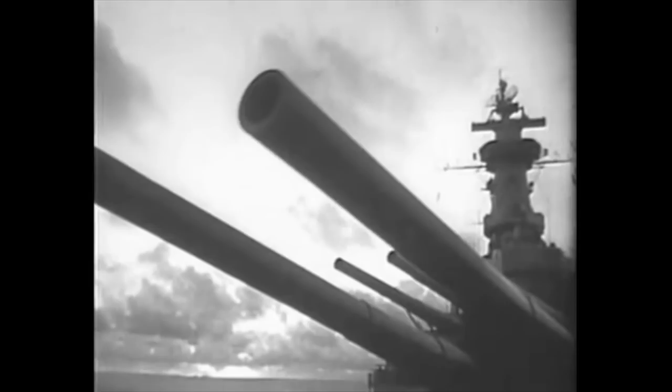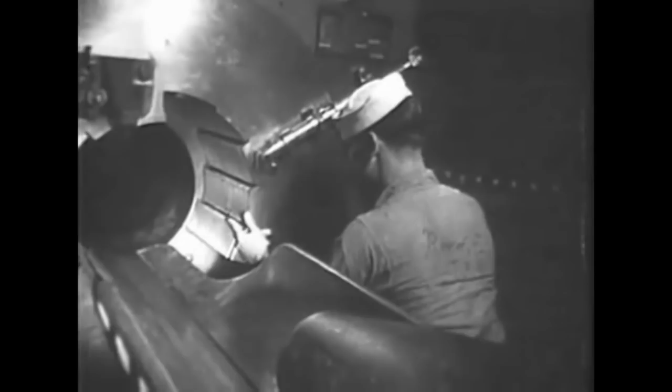One of a kind, the only naval warship to serve in both world wars. A date which will live in infamy. Now she's battling her most serious enemy yet, time. After serving with such distinction in the last century, she deserves nothing less in the next. Brad Woodard, 11 News.

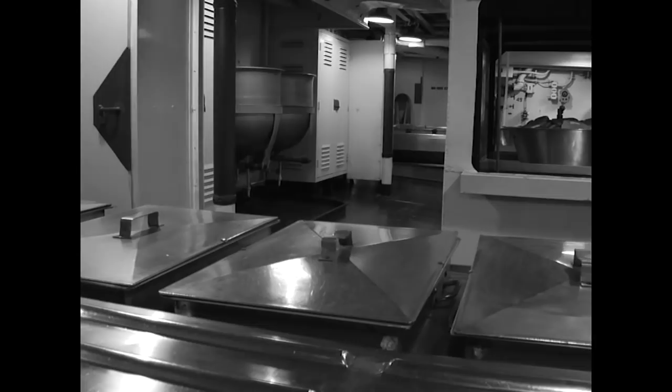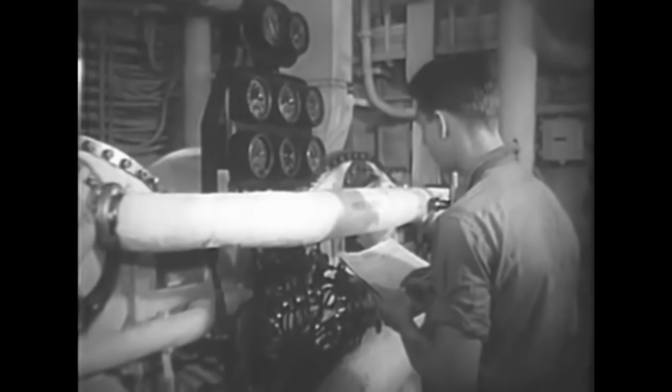The Texas Parks and Wildlife Department, or TPWD, has been challenged with a huge and inspiring endeavor: the preservation and protection of the historic battleship Texas. The agency's task, as mandated by the Texas Legislature and the Legislative Budget Board, is to place Texas in a permanent dry berth. In October of 2010, a diverse team of experts, led by AECOM, was carefully selected by TPWD to aid them in accomplishing this significant task.

TPWD Project Manager Neil Thomas tells us more. As the project manager for Texas Parks and Wildlife, it's my charge to ensure that this project adheres to the 3 requirements set forth in the RFQ. Beyond those requirements, however, I feel that the success of the dry berth project is contingent upon 3 big picture ideals: those of respect, teamwork, and communication.

It is TPWD's desire to respect all the resources at play on the project. Throughout all phases of the project, we will be committed to respecting the cultural, natural, and fiscal resources we have. Our task is clear: to dry berth the battleship. But in order to accomplish this task, we must forge a sense of respect and open communication between TPWD, the U.S. Navy, and all the interested stakeholders that will endure throughout the project, regardless of the outcome.

If we do this, it will be possible to do the best thing for the ship, the best thing for the battleground, and to be good stewards of the cultural, natural, and fiscal resources belonging to the citizens of Texas. This project will achieve a viable solution to a very complex problem. The solution, however, must be in sync with federal partners, must comply with federal regulations, and must consider a multitude of invested stakeholders. The only way forward, then, is through a team approach, built on mutual respect and open communication with all the parties involved.

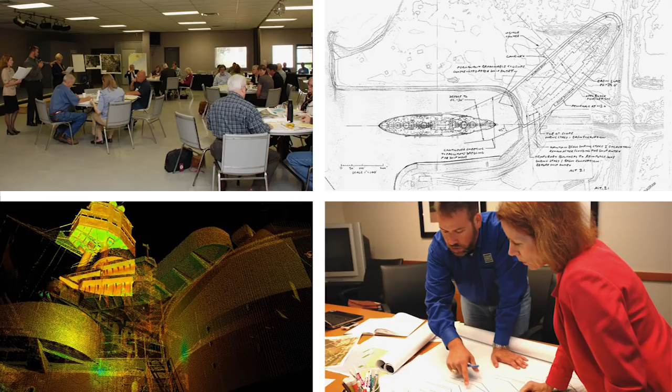Throughout Phase 1 of the project, the TPWD AECOM team has been hard at work to provide the study, analysis, and coordination necessary to launch into the next project phase. TPWD Ship Manager Andy Smith has provided Neil with as-needed project support during the entire process. For me as the Ship Manager of Texas, the Phase 1 activities I was most focused on were 3 things. I set a priority on reversibility, that we could undo the proposed solution and that no permanent changes are made to Texas. The second was to make sure the impact of the dry berth project on the battleground was considered and mitigated. Finally, and equally important, was that the solution is more economically viable over a very long term for the overall operations and management of the ship.

Keeping these requirements in mind, the TPWD AECOM team has accomplished the following during Phase 1. Evaluation of the battleship's current condition. Studies and surveys, including geotechnical, topographical, bathymetric, natural, and cultural resources constraints analysis. Development of siting constraints. Regulatory coordination. Stakeholder outreach. Evaluation of the Proceanic Report on dry berth options. Identification, preliminary design preparation, and cost estimates of temporary mooring locations during construction, and development of 4 dry berth design options and cost estimates for each.

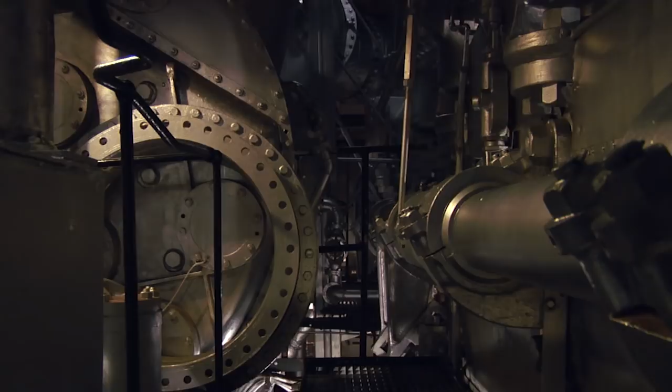AECOM Project Manager Jerry Farhat led this carefully planned Phase 1 effort. I am Jerry Farhat, AECOM Project Manager for the Texas Dry Berth Project. It is an honor for me to manage the many moving parts of this significant project. To develop dry berth design criteria for moving Texas, temporarily and permanently, the design team needed to understand the ship's current condition, risks associated with moving her, geotechnical criteria affecting foundation decisions, final aesthetics while in dry berth, visitor access to the ship, achievement of reversibility, stakeholder feelings about siting and design decisions, and regulatory agency involvement.

Scott McCoy of Halcrow directed temporary mooring investigations for the Battleship Texas, including on-site and off-site alternatives. Our role on the AECOM team was threefold. First, we performed a site selection study of temporary berthing locations for Texas. This effort considered the possibility or desirability of moving her to a temporary location during dry berth construction. We investigated existing docks in the Houston Ship Channel area to see if they could meet TPWD's needs during the construction period.

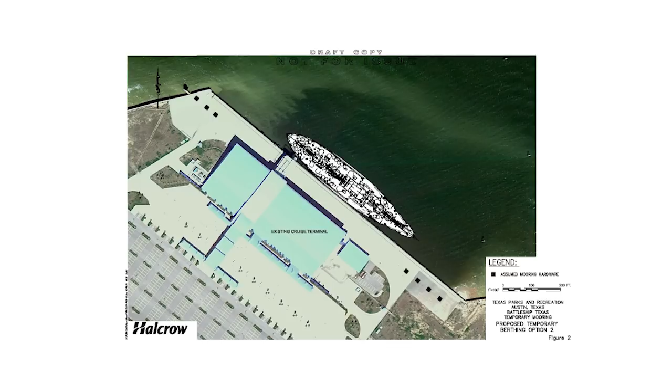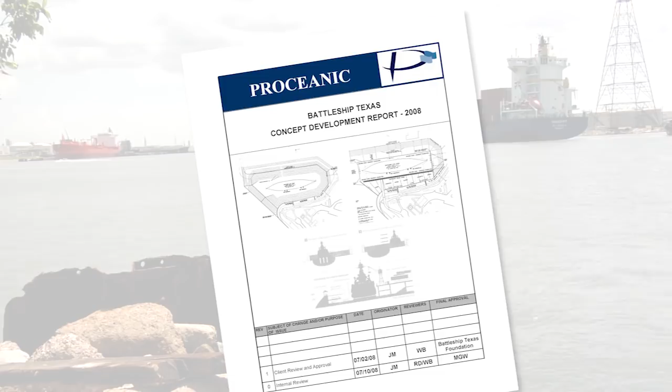And we worked with the design team to examine whether we could construct a temporary berth at the current location. We were also tasked with reviewing the options developed by the team for the permanent dry berth. At the onset of Phase 1, based on the alternatives in the Proceanic report, it was assumed Texas would need to be moved to a temporary off-site berth during construction. The Halcrow team responded to this need by studying sites throughout the Houston Ship Channel for temporary placement of Texas, considering ongoing operations, visitor access, navigability for the battleship, and cost of implementation.

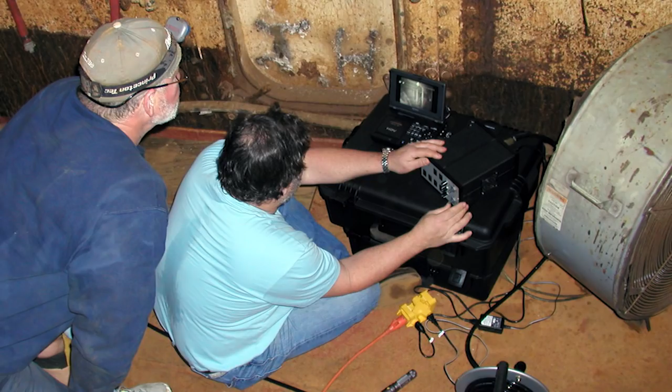As the team progressed into Phase 1, in-depth vessel inspections revealed that moving Texas into the Houston Ship Channel could present considerable risk to the ship, and cost estimates produced for temporary mooring options on and off-site were prohibitive. The team responded by developing design options that eliminated the necessity of off-site mooring facilities.

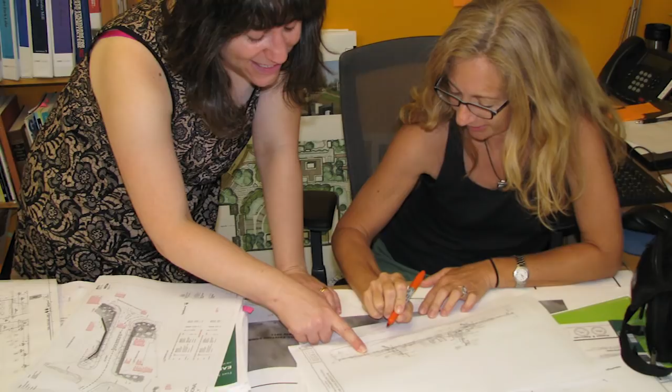Roger Courtney of AECOM led the team in terms of landscape architecture and aesthetic considerations for the dry berth configuration of Texas, coordinating design, cultural resources, and the visitor experience. Our role in Phase 1 was to consider the aesthetic presentation of the Texas, particularly with respect to presentation of the battleship, preservation of the integrity of the battleground, visitor safety, and visitor access. Working closely with the design team, we responded with development of landscape, site plan, and cross-sectional dry berth design options.

We looked at the aesthetic and technical issues associated with access, drainage, planting, and vegetation concerns in the design of the berth slopes. We studied berth slope stabilization, and we began to look at berth siting options in the wider context of landside, program, and battleground relationships. We have also been involved in the initiation of the National Historic Preservation Act, Section 106 consultation process. Roger and his team worked seamlessly with the design team to coordinate the visitor experience for each design option, including site planning and circulation, visitor access and egress, and innovative temperature control efforts within the basin.

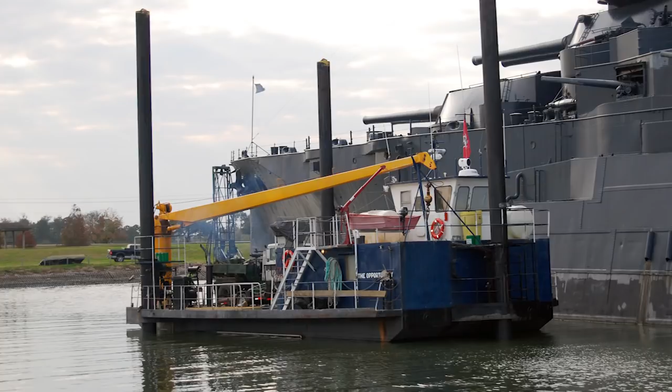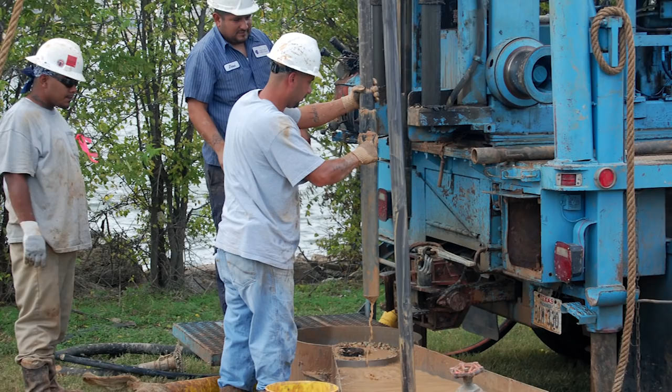Mike Hasen of HVJ led the geotechnical analysis for Phase 1. HVJ developed critical geotechnical data for designing alternatives. The geotechnical studies performed during Phase 1 are critical to any siting decision related to the dry berth project. In our investigation, we analyzed subsurface soil and groundwater conditions associated with the current ship's mooring. The primary output of this analysis was information we must have to design a foundation for the dry berth that will support the Texas. Using the information we developed, we then coordinated very closely with the design team to evaluate the application of sheet pile cofferdams, king piles, and excavated slopes, all of which are options for construction of a dry berth.

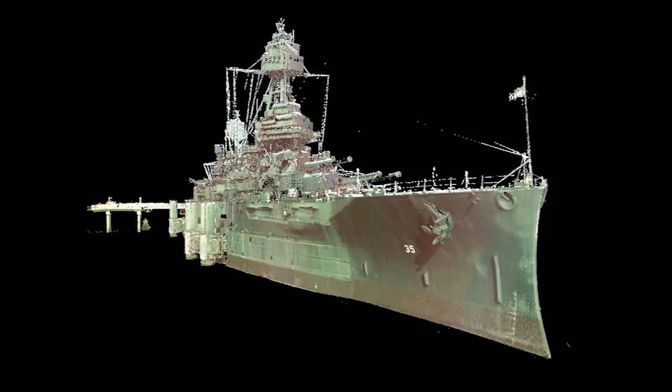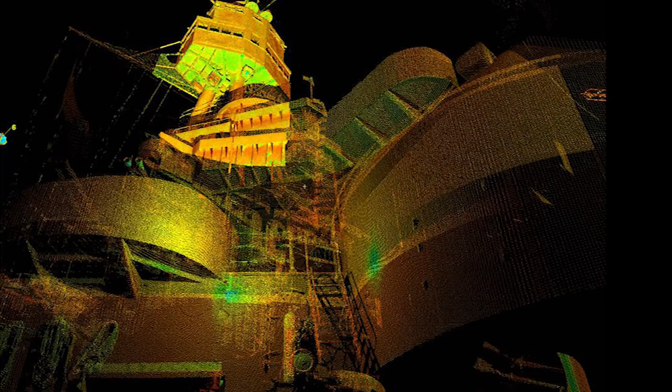To consider moving the battleship to an off-site location, either temporarily or permanently, the team needed to understand her current condition and the risks associated with moving her. AECOM conducted high-definition scanning, or HDS, for 85% of the vessel. The HD scanning efforts provide an invaluable blueprint of the ship's precise condition today, prior to construction. This data provided TPWD with accurate measurements of each frame of the battleship, organized by 360-degree images and videos of each compartment of the ship. This information will be key during the final design efforts for a dry berth, and it can be utilized to propel public education and awareness efforts for the battleship.

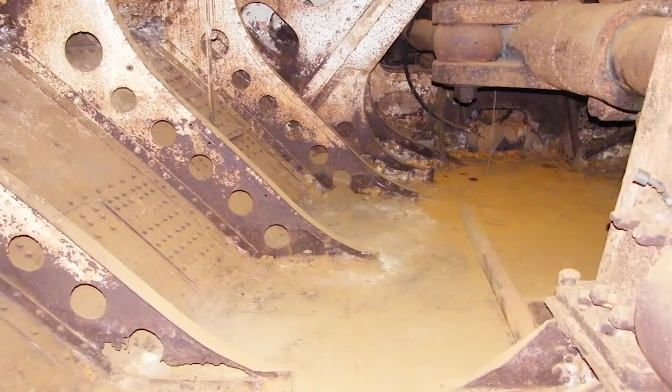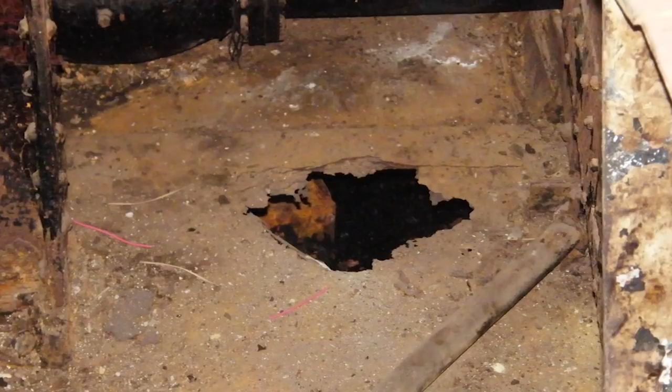Additionally, a hull assessment, including dive surveys, was carried out by Ocean Technical Services. The HD scans and hull investigations revealed surprising and alarming news about Texas's fragile condition. Joe Lombardi, recognized as a leading expert in historical ship preservation, surveyed the battleship's current condition and provided recommendations for repair options. My effort on Phase 1 was to perform a detailed structural analysis of Battleship Texas.

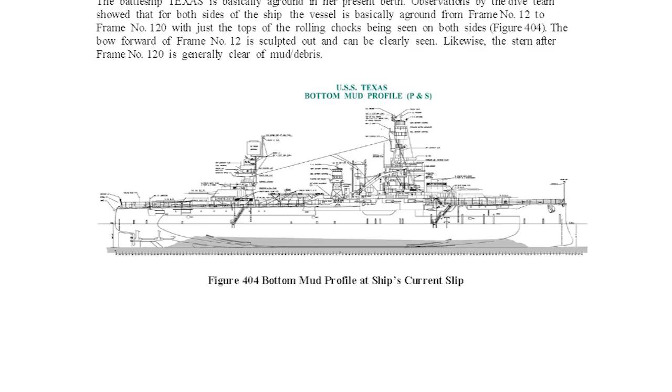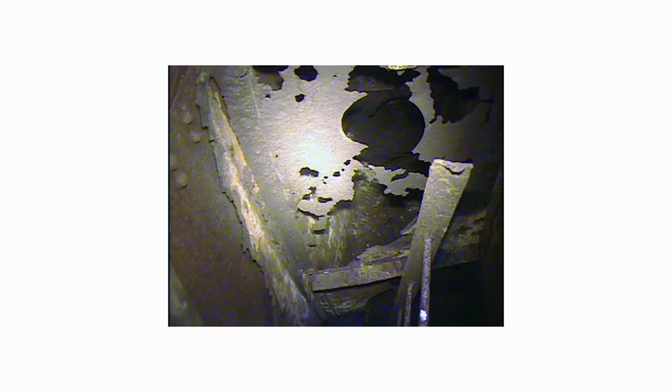As part of that effort, my subcontractor performed a diving assessment on the underwater hull to determine, very importantly, a bottom profile showing us the status of the battleship where she is currently berthed. We learned that the hull is sitting on the bottom. My team also performed a study of the hull thickness and mooring structures. Very importantly, we performed a stability analysis giving us vital information about what may happen when we move the ship. We learned that a great deal of repair must be performed on Battleship Texas before she can be safely moved.

Patty Matthews of AECOM coordinated with several teams across the nation to lead cultural resources, environmental, and public involvement efforts. This team includes representatives from AECOM, SWCA, TBG, and Crouch Environmental Services. My role in Phase 1 was to lead initial cultural resource and environmental study efforts in preparation for compliance with 2 federal regulations in Phase 2, the National Historic Preservation Act, or NHPA, and the National Environmental Policy Act, or NEPA.

Throughout Phase 1, we coordinated with the Department of Navy, Naval Sea Systems Command, or NAVSEA, the lead federal agency for this project. NAVSEA is directing the NHPA consultation process and NEPA compliance efforts. Under NAVSEA guidance, TPWD has initiated the NHPA consultation process and begun preliminary consideration of alternatives for NEPA through the development of the Description of Proposed Action and Alternatives, or DOPA. The team will continue to coordinate closely with NAVSEA throughout Phase 2 of this project.

We began Phase 1 by reviewing existing documentation of historic cultural resources for the current site. This information was compiled into a cultural resources constraints analysis. Public involvement is a critical part of NEPA, and we initiated this effort in Phase 1 by hosting a stakeholder workshop in May. This workshop was attended by federal, state, and local agency representatives, as well as members of key stakeholder groups. Initial comments were collected and a comprehensive workshop summary report was compiled. This report is available on the project website.

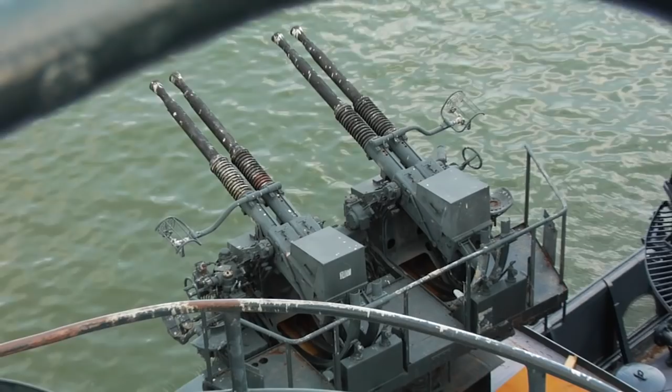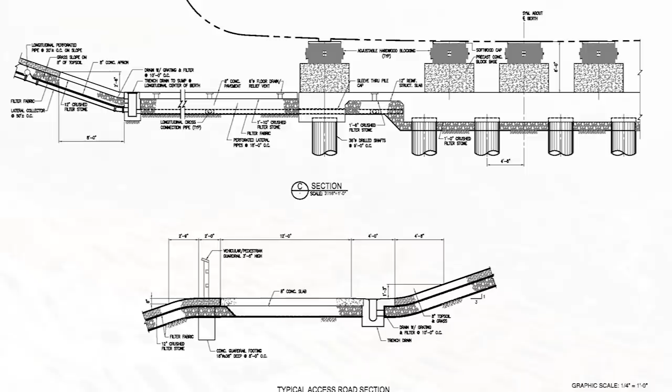In order for the design team to develop alternatives, we required information from our team, including Joseph Klein, Shubhra Misra, Rachel Lloyd, and others. Joseph Klein will tell us more. My role on the team was to develop the on-site dry berth alternatives you're going to see today. Critical design considerations included the foundation layout and development of cross-sections for the keel block loads. In terms of alternative development, we relied on the scope of work, the Proceanic report prepared in 2008, and additional goals voiced by the Texas Parks and Wildlife Department during our regular progress meetings.

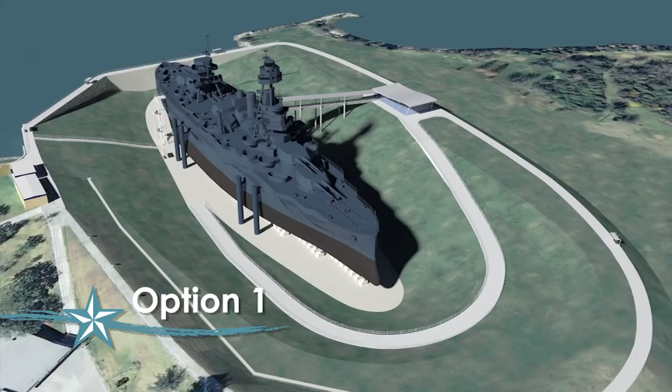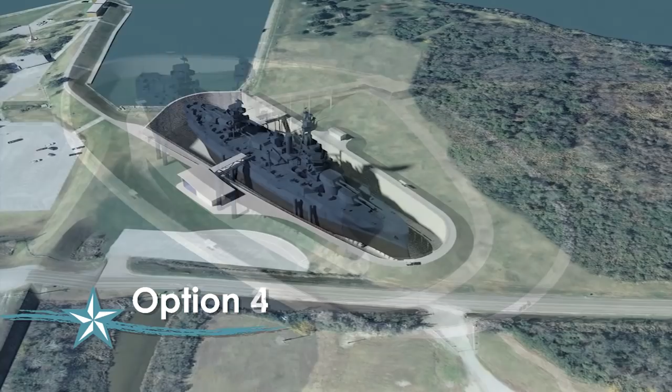By creatively sequencing construction and prioritizing resources, we're prepared to provide a durable and aesthetically beautiful solution to dry berth the Battleship Texas. Here are the 4 most promising dry berthing options that the team is putting forward for consideration, selected from the numerous alternatives developed and considered by the team during Phase 1. While each of these options meets the project's basic design criteria, they differ in the extent to which they meet other project goals. Visitor safety and amenities, Americans with Disabilities Act or ADA compliance, and visual aesthetics, including landscaping, would be an integral part of every design you will see today.

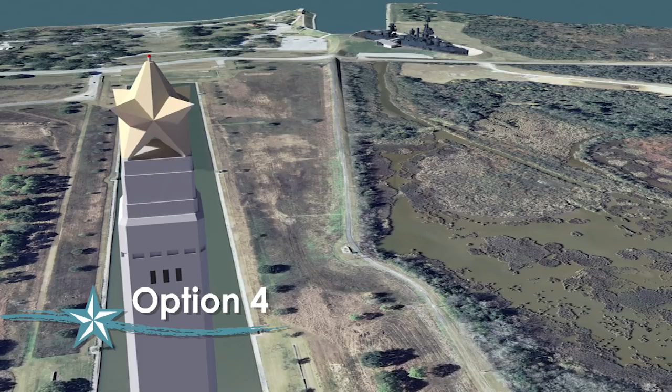Vegetation included in the visual representation you're seeing today is purely representational at this juncture. Stormwater and seepage drainage have also been taken into consideration for each alternative design. Please note that design options are identified by numbers 1 through 4. However, this naming convention does not indicate preference or favor on behalf of the TPWD AECOM team.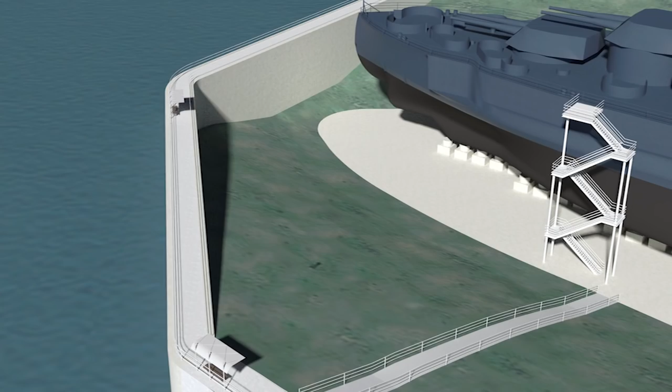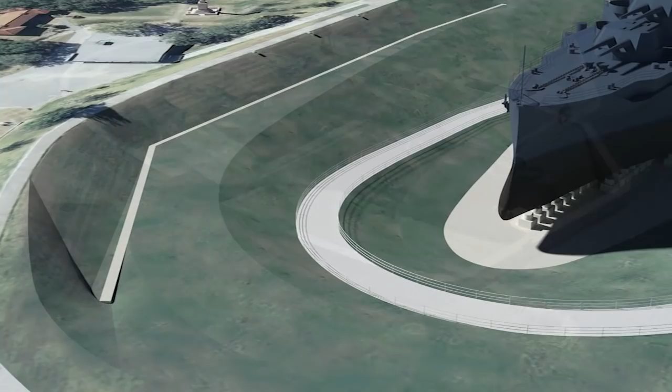Option 1 would utilize Texas's current berth location for the construction of the dry berth. A cantilevered king pile bulkhead would separate the dry berth from the waters of the Houston Ship Channel, and sloped earthen revetments, or retaining walls, would be excavated around the perimeter of the dry berth. The layout would retain the existing south side bulkhead.

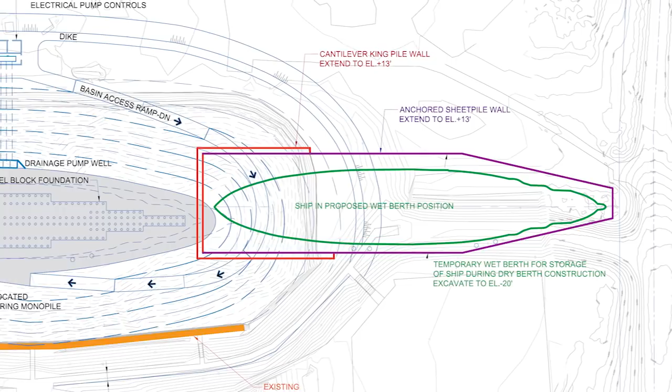During construction, the battleship would be transferred to a temporary wet berth located east of her current position. This wet berth would be comprised of temporary sheet piles and located just west of Independence Parkway. This temporary berthing option precludes risks associated with towing Texas into the Houston Ship Channel, and it provides a direct, straight pathway for Texas into and out of the wet berth.

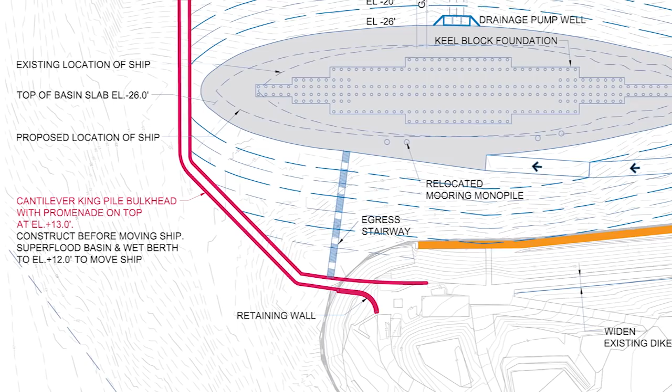This option proposes to construct the closure cofferdam on the west and the dikes on the other sides before transferring the ship to the wet berth. With the top of the entire perimeter of the dry and wet berths elevated above elevation plus 13 feet for flood protection, water would be pumped into the dry and wet berths to raise their water level to elevation plus 12 feet, thereby raising the ship from its present position.

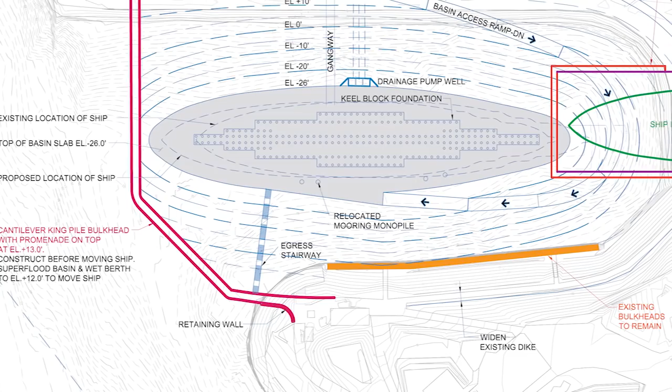The ship would be transferred to the wet berth while this superflooded elevation is maintained, and would remain in this elevated position in the wet berth for the remainder of construction. This approach minimizes the amount of dredging needed for ship transfer and allows the dry berth slab to be constructed at relatively shallow elevation minus 26 feet, minimizing dry berth excavation and footprint.

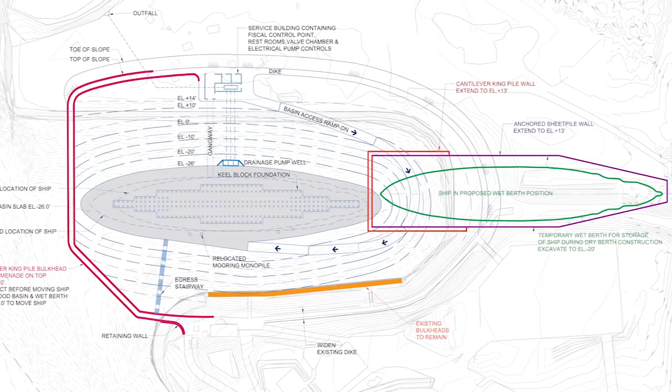Once the ship is moved, the dry berth would be dewatered to allow construction of the keel block foundation and excavation of revetment slopes. The foundation would be pile supported, with hydraulic uplift pressure relieved by a grid of under-drain pipes collecting seepage water beneath the dry berth foundation. Once construction of the foundation is complete, keel blocks would be laid down and the dry berth would again be superflooded to meet the elevated water level in the wet berth.

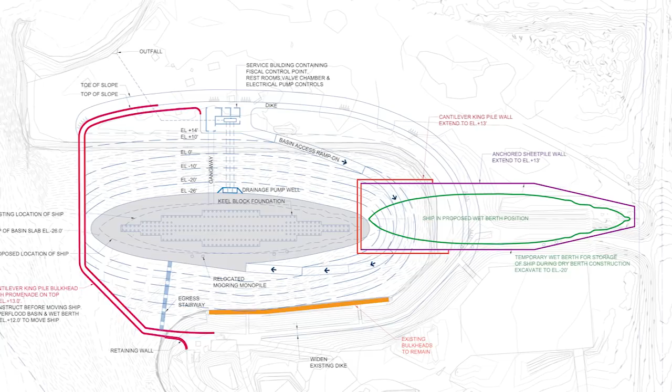The west wall of the wet berth would be breached so that Texas could be transferred into her new home. Bringing the pool elevation back down, Texas would be seated onto the keel blocks and then secured into a location about 50 feet west of her existing location. The temporary wet berth would be deconstructed and construction of the eastern portion of the dry berth would be completed.

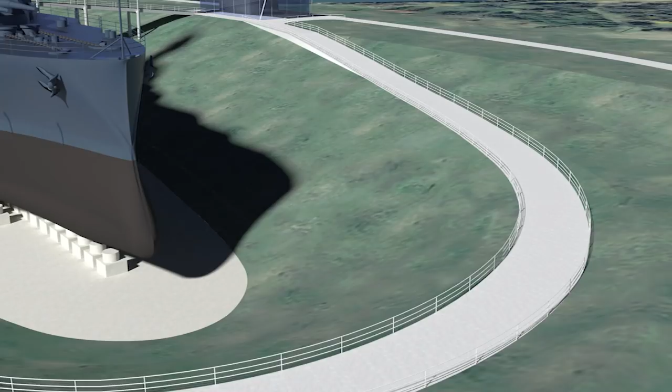Following her placement on the keel blocks, Texas would be approximately 5 feet above her current height, providing a minimal increase in visual impact on the site. The basin walls of Option 1 would be vegetated slopes with a wraparound access ramp leading down to the basin slab. Visitor and maintenance access to the ship would be achieved through a gangway located on the north side of the dry berth. Supplementary egress would be provided by a staircase on the south side of the ship, extending from Texas's main deck down to the basin slab.

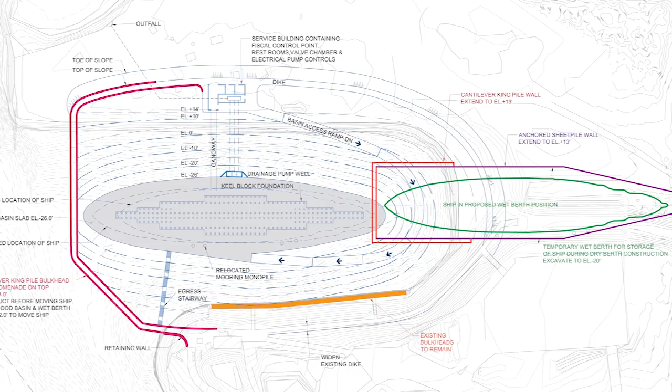One disadvantage of the superflooding concept is that reversibility, the ability to launch a refurbished Texas into the channel at a future date, would be a complex and expensive proposition. All 4 of the dry berth options presented are reversible, although the amount of effort and money required to achieve reversibility varies from option to option. The unique superflooding aspect of Option 1, however, dictates that the ship would rest in her new dry berth at a height that would not allow her to float off the blocks at the channel's normal water levels. This makes the reversibility of this option the most complex of the options considered.

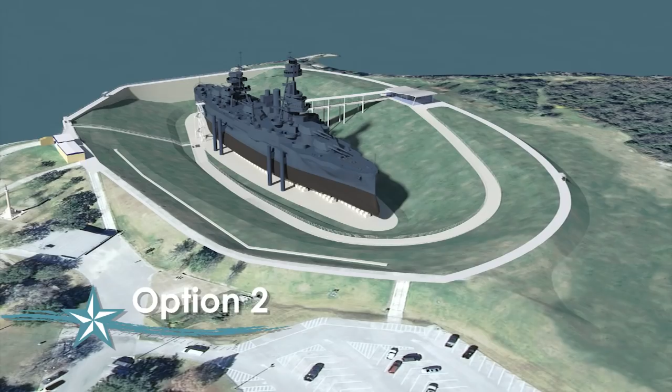Option 2. Option 2 is similar to the previous option, but without superflooding. It also includes vegetated sloped revetments constructed within the site of Texas's current wet berth. Without the process of superflooding, this option would require a deeper foundation at elevation minus 38 feet, 12 feet lower than Option 1. Because of this added depth, the width of the entire dry berth would be greater, and there would be greater land-side impacts directly north of the existing berth.

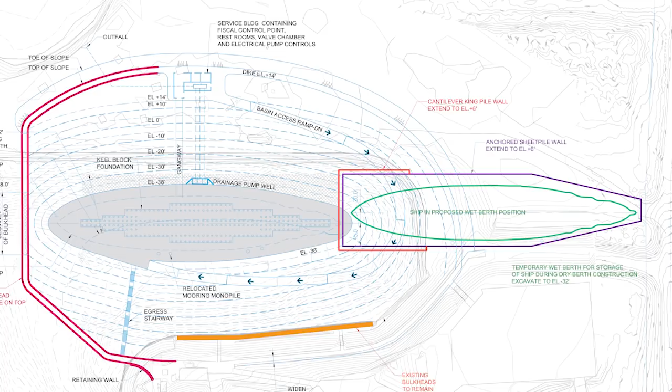To protect the existing south side bulkhead from undermining by the proposed excavation, the dry berth and the temporary wet berth would be offset about 50 feet north of the ship's existing location. Following construction of the dry berth, Texas would be about 7 feet lower than her existing height, offering less of a visual impact to the battleground site.

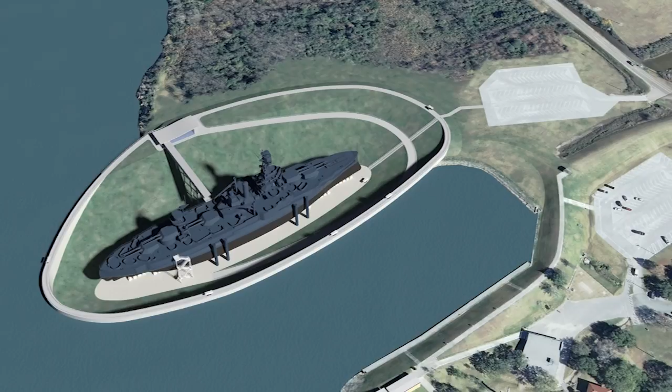Option 3. Option 3 offers a different siting location, utilizing land just north of the current mooring location. Like Option 2, a foundation depth of minus 38 feet is needed. This option has the largest land-side impact of the alternatives presented here and has wetland impact as well.

Unlike the previous options presented, Texas would remain in her existing location during construction, with only minimal modifications to existing ship utility services required. Besides reducing the amount of temporary work needed, this feature would allow Texas to remain open to visitors throughout the dry berth construction process. The dry berth construction would likely be an interesting attraction for visitors to the site, to the extent that construction zone access could be safely allowed.

As in option 2, Texas would rest 7 feet lower than the existing height when seated on the keel blocks. Like the previous design options, the basin walls of option 3 would be vegetated slopes with a wraparound access ramp down to the basin foundation.

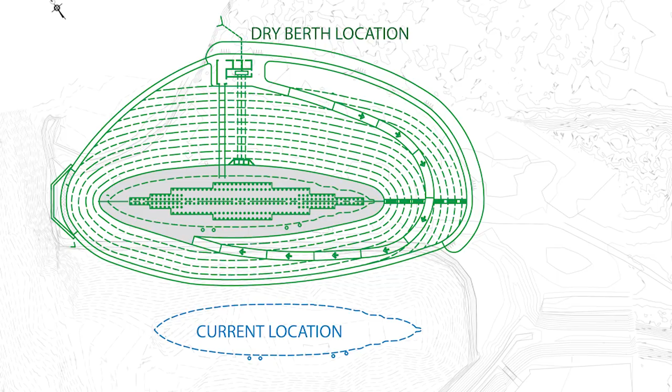Dredging of the western section of the existing wet berth and the new dry berth would be required for this design option, and this is the only option that would require that Texas be towed into the Houston Ship Channel to enter the dry berth. Given the results of recent hull assessment surveys and HDS data, Texas's voyage into the Houston Ship Channel, although of short duration, could be risky. It would also require U.S. Coast Guard permitting.

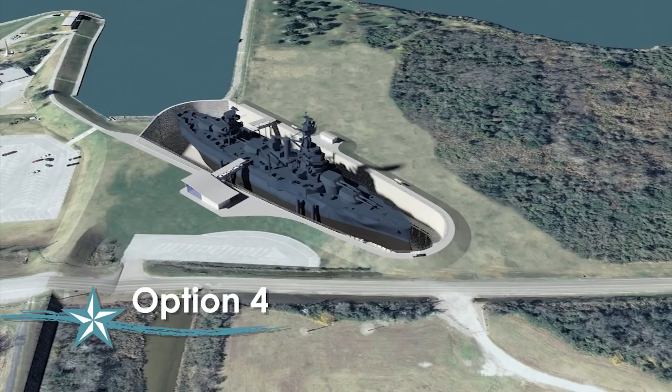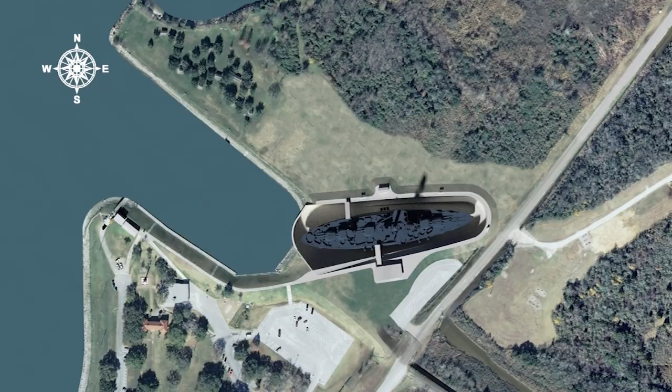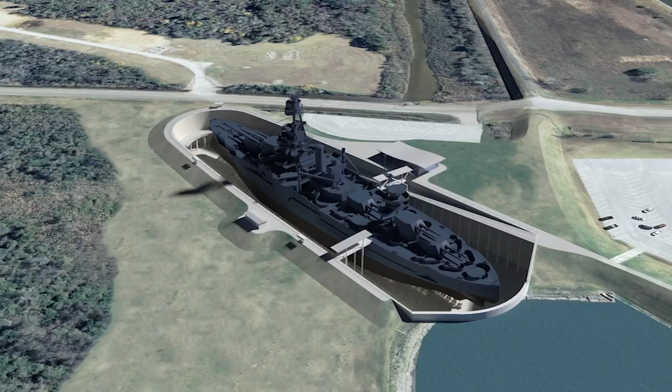Design option 4 differs from the previous alternatives in terms of structural design and placement of the battleship itself. The dry berth would be constructed northeast of the existing mooring location and would be constructed using an anchored reinforced concrete slurry wall around the perimeter of the berth and a cantilevered steel king pile wall at its entrance. The ship would be berthed diagonally in relation to her current position, and she would be dry berthed in close proximity to Independence Parkway.

This option would result in the smallest footprint of the 4 options presented today, and it would also allow Texas to remain at her existing mooring during construction. As in option 3, visitors would be allowed on the vessel throughout the dry berth construction process. Although this option is located closer to the San Jacinto Monument, Texas would rest 7 feet lower than her existing height, reducing visual impacts to the battleground.

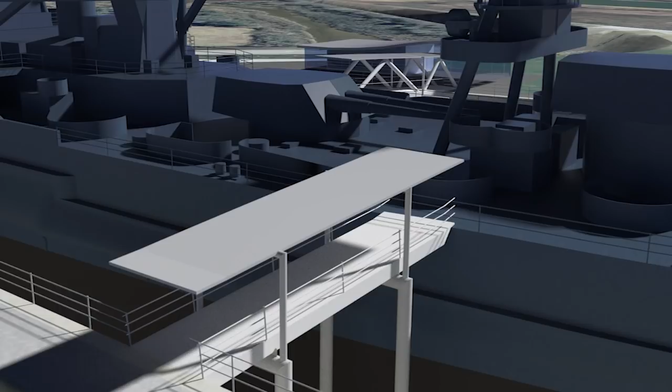A wraparound ramp would provide access to the basin foundation, providing at-grade access on the south side of the dry berth. Unlike the other 3 alternatives, the service facilities and main access gangway would be located south of the dry berth. This option would provide an auxiliary gangway on the north for supplementary egress and maintenance use. This option also allows the flexibility to intentionally flood the dry berth for extended periods of time with minimal impact to the dry berth structure.

Additional, more detailed design and background information is provided in the Dry Berth of Battleship Texas State Historic Site Phase 1 Conceptual Design Report for TPWD review and consideration. Our team is committed to providing a dry berth design that meets the needs expressed by NAVSEA, aligns with the goals of TPWD, and instills pride and a sense of the historical significance of the battleship in every person who steps aboard the mighty Texas.

Lori Baer, AECOM Associate Vice President and Project Coordinator for the Dry Berth Project, concludes today's presentation with the team's final thoughts. Today, the Battleship Texas Dry Berth Project team proudly presents 4 viable on-site berth design alternatives for consideration by the Texas Parks and Wildlife Department. During this Phase 1 process, a multifaceted and thorough examination of constraints and contributing factors was achieved. This effort ranged from an in-depth marine survey of the battleship to geotechnical and structural analyses, and from stakeholder and agency coordination to environmental and cultural resource studies.

The accomplishments of Phase 1 will propel the team forward to complete our tasks for Phase 2. As we initiate and complete the NHPA and NEPA compliance processes, we have the facts, the understanding, and the relationships to ensure that this project is a success. Operating in alignment with the leadership and guidance we receive from our TPWD project manager, Neil Thomas, our team's success will be achieved through a strong commitment to communication, teamwork, and respect throughout the project.

Fully enthused by this great challenge, we continue to be honored to be here today, providing resourceful and worthy solutions for the citizens of Texas. We are on board and ready to participate in creating Battleship Texas's permanent place in history.